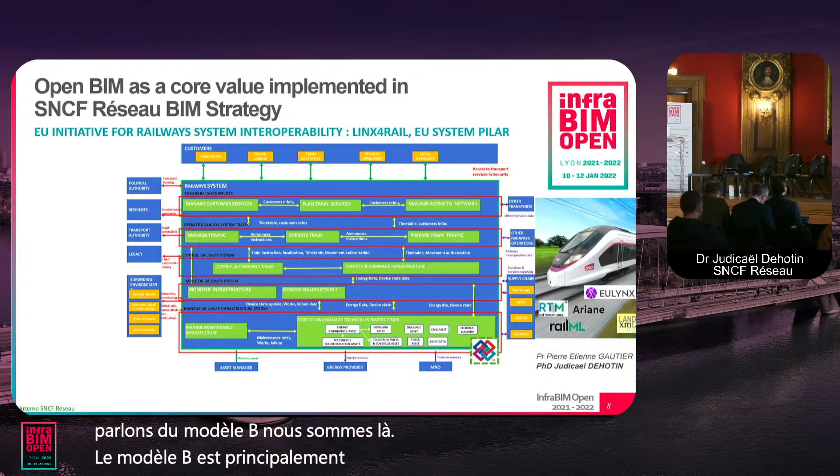You need to have information for the infrastructure. The infrastructure is the base. You have a turnout, and combination of turnout, you have some control and command stuff that manage the train direction, and these things are directly connected to the physical infrastructure. And that is where I want to come back to. When we are talking about BIM model, we are there. BIM model is mainly that. But we need also, if you have some infrastructure, not just to have a digital mockup, we need to transfer information about these things, physical infrastructure, to the control and command stuff.

If the information is not good because the BIM model is not good or doesn't have enough information or is non-shareable, we have some problem there, we have some problem there, and finally people don't have the train on time. So basically, that's the problem. And as you can imagine, many industries are involved in that.

It's not only one industry. So the issue of open BIM for us is how, what you see here in the vertical line, is about this information. It's about many industries, many software, many databases, and each box here may be software, may be a database, may be a process, may be people, may be organizations dedicated to one process. So if they need this information, if there is one provider, one technology provider anywhere, one thing we need is what is the added value of this box. We need to know exactly what is out. If not, we cannot manage all that. The railway system cannot be manageable.

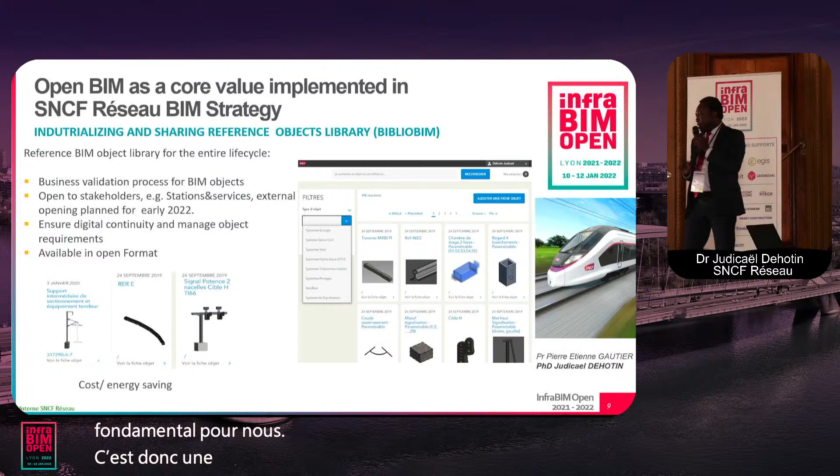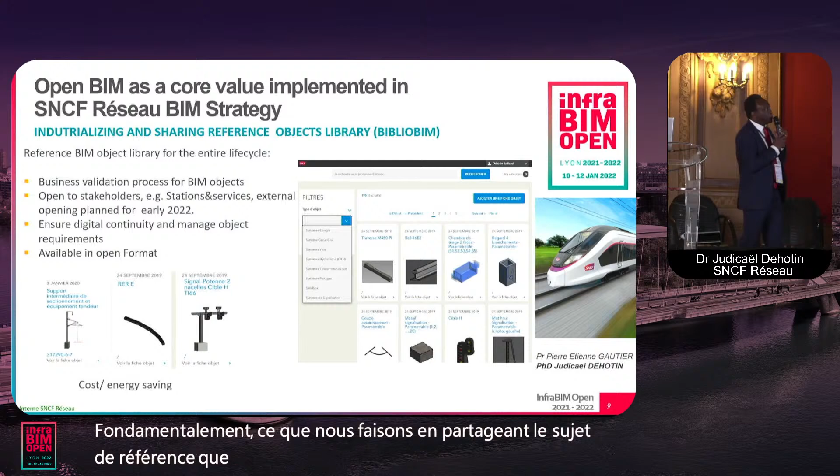So now I will go back into more detail on the BIM program. Basically what we are doing is sharing reference objects, we put in place a reference library for railway in the French railway system, called BIBLIOBIM, with the objective to share with all stakeholders. Inside this object, we have our own requirements around this object, and this is naturally available in open format. We don't tell people to use one tool or another, we let them have the choice to have the real performance, because what we need is the performance of the function we need to reach. You can use any software you need, but what we want is to use the right information and to output the right one.

And we also use this consistent with the French strategy on BIM. We have a BIM level 2 approach right now. That means many people can use different software because you have many domains, and each domain has expertise that we need to be sure is the right one for the system. And this information is shared to integrate it in a kind of common data environment at the center. And we choose one, but that is the core of the problem.

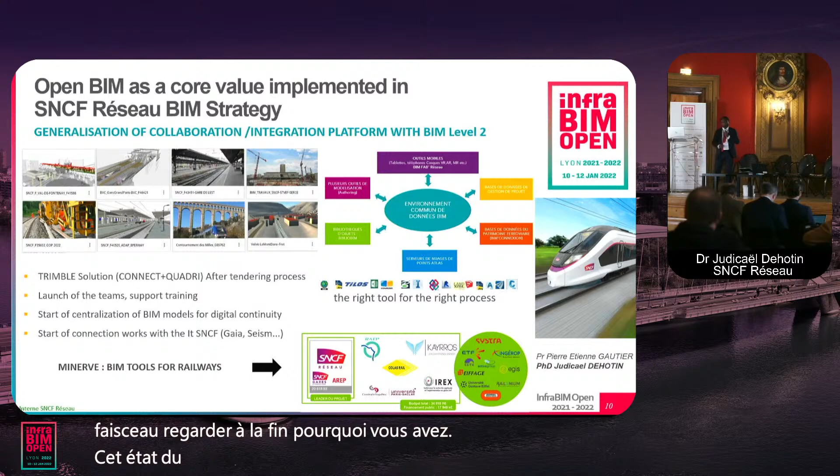And we also launched around that a new project called Minerve, for the railway system, about engineering of the system. We cannot build a good railway system without managing the requirements and the engineering of the system. So we are involved in creating or adapting existing tools for railway requirements. We launched a program to test, create, and share tools and requirements about what we need to do system engineering of the railway, and be sure we can manage the requirements, manage the performance of the system, the cost of the system, and have traceability - when you have a BIM mockup at the end, why you have this state of the model depends on the requirements you had at the beginning of the process. So we do that for this reason.

And a few words about digital continuity. In the digital maturity of the software, we have some workflows, we have BIM for conception, construction, we have a platform, basically BIM level 2, to share and organize the process. And for the digital twin, we have to deal with many databases to integrate, and also have a roadmap on that. We do this in parallel. Basically now we are doing experimentation, and building confidence in what we can do to make the system right and have BIM deliver the performance expected.

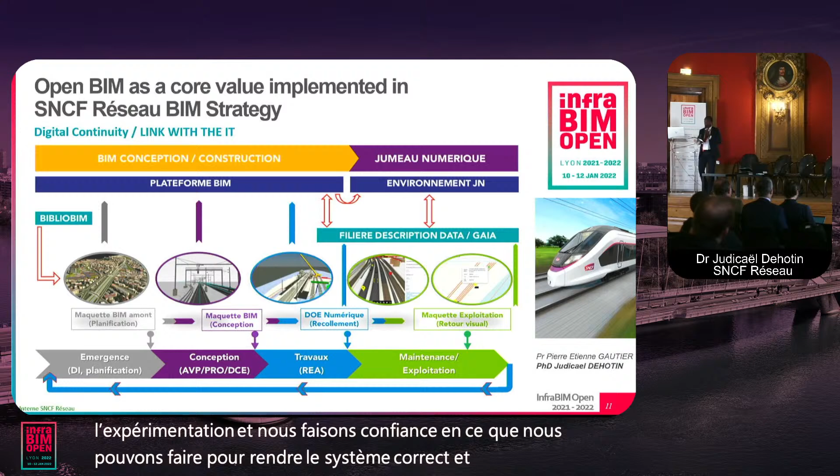Really to avoid that, because it's not cost saving. And about construction, we just reached the first BIM project that reached the construction phase, and we are doing something to prepare how we can bring BIM to the field. If you are interested in that, I invite you to scan this code on LinkedIn.

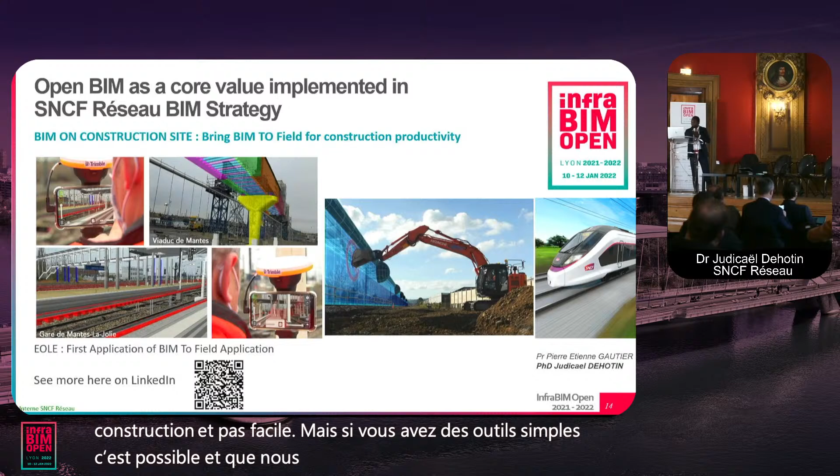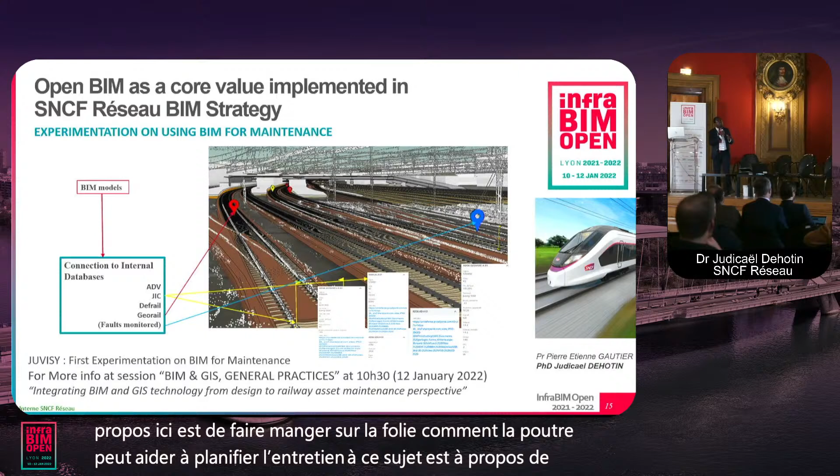We also have some implementation on BIM maintenance. If you are there at 10:30, I have one presentation on that. We have experimentation, and what this is about is to make, on the maintenance side, how BIM can help to plan maintenance. That is the talk I will have now, to present this experimentation in more detail.

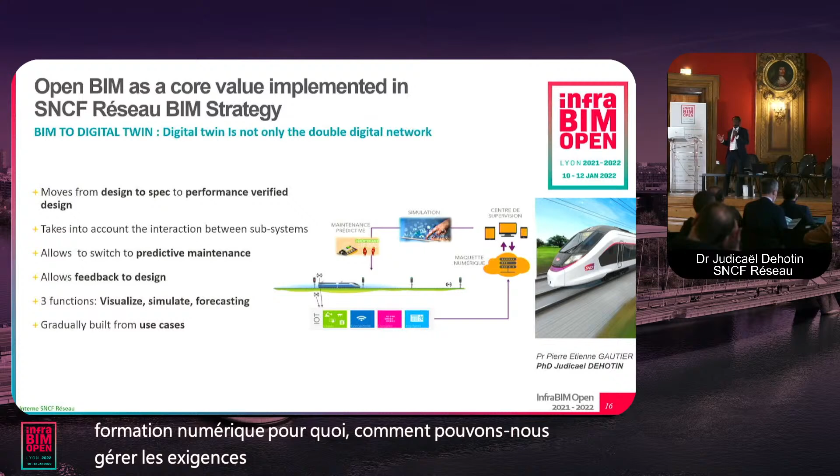By the end, the digital twin - we are working on it, with use cases we are developing. If we have a digital twin, for what purpose, how can we manage the requirements of the system, and which is the main use case that can bring value to the system. We make some experimentation on that, and progressively the idea is to develop more and more use cases and develop the capability of the digital twin.

Just focus on the performance that can be brought to the system, not to make the digital twin with everything on it, with the issue of managing so much information but not knowing exactly for what. And what is the initial requirement, managed to the state we have in the phase, and the system you have to manage, and the objective you want to reach.

So for the digital twin, the approach is really to bring this into the basic system engineering approach. You have some requirement, and you have some function, and for each function you can develop a component - you can develop software, you can develop a database, or you can just put in place a real process. By the end, you have some state of your digital twin, and you can trace back the traceability between the state and why it's there, and what the initial requirement was for that.

The idea is to have a digital twin based on 3 layers. The resource layer, which is the ground of information you manage to deliver service. The operation layer, which is really about using information to run the train, so how we can deliver service with that. And by the end, how we can deliver service to the end user and the customer. So that is basically the idea around that - we are working on it, it's an ongoing work.

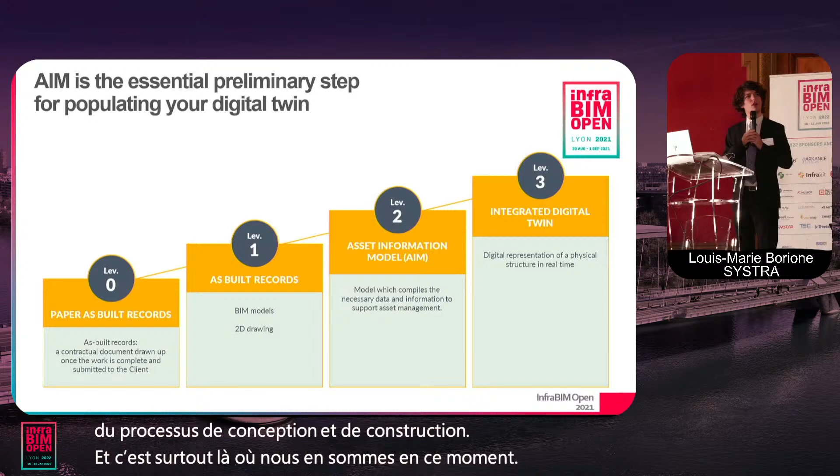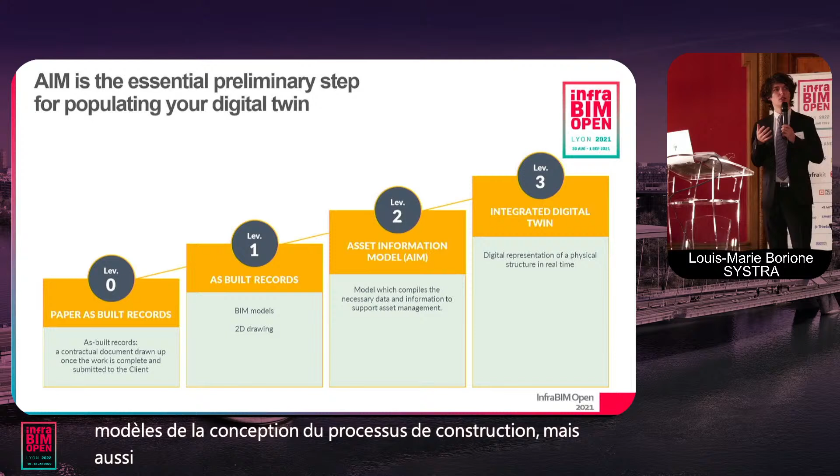We imagine that our goal is to be delivering a level 2, an asset information model. So you deliver all the BIM models from the design and build process, but also a dedicated asset information model which centralizes all the aspects of an asset needed for the client to operate and maintain this asset. And this is just before what we could call level 3 of the digital twin for the future, an integrated digital twin with every aspect.

Right now, we want to focus on something that is more achievable, not seeking something 2 steps ahead, but going one step at a time, from where we are right now, level 1, to what we do on some projects, level 2 of the road to digital twin.

So to really understand the purpose of the asset information model, it is to be able to centralize and structure the information that will be required for the operation and maintenance phase. So it could be, for example, a list of equipment, total maintenance cost, record of installation and maintenance dates. Those kinds of data are not currently in our BIM model. In our BIM model, we enter design information, we enter construction management information, but not those kinds of information.

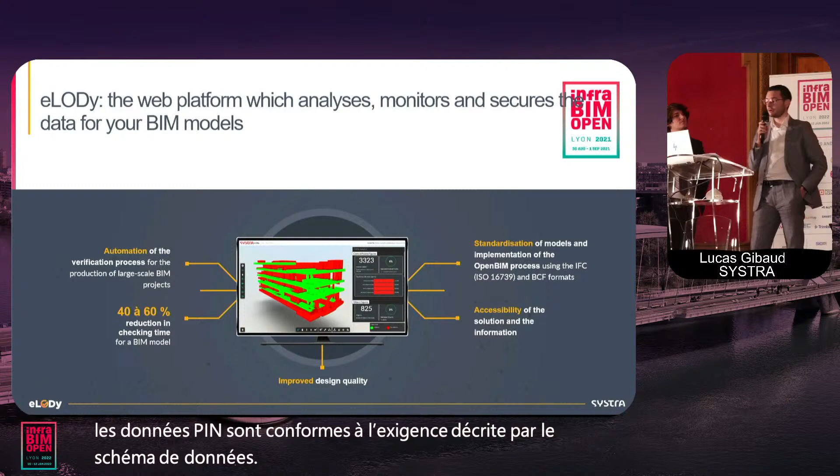So if we take the schema presented by Louis-Marie just before, we have to ensure that the data contained in the project BIM models, which is the PIM data, is compliant with the requirement described by the data schema. So in order to check these requirements, we have developed a BIM model checker application called eLODy. eLODy is a web application that allows the user to get the data schema for his project and to use it to control the project information model.

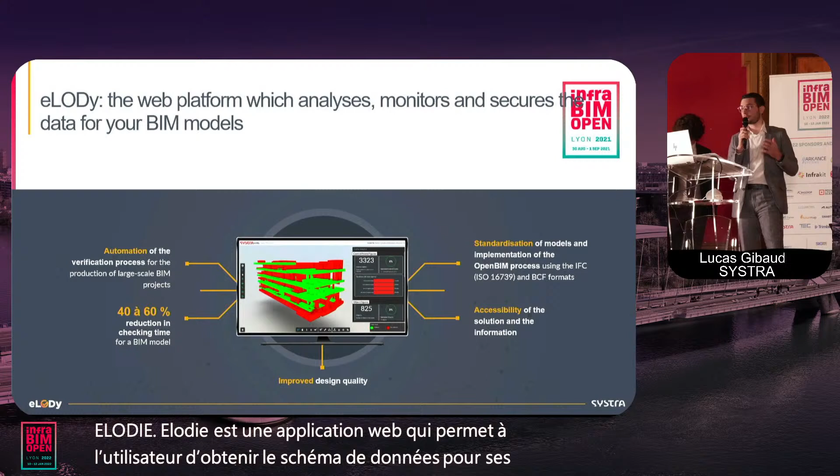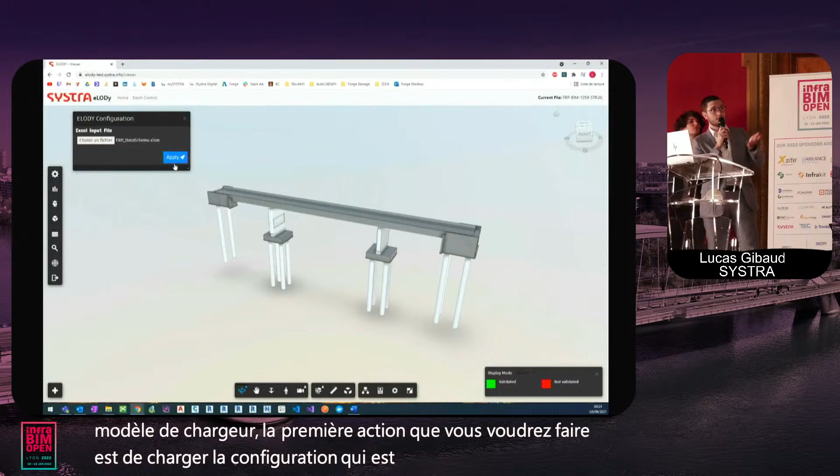So now let's move to the application for a quick demo of the functionality of the tools. When you are in the application and you have loaded your model, the first action you will want to do is load the configuration, which is the data schema. This configuration is stored in an Excel file, and as soon as you have loaded this configuration, the result of the checking will be displayed on the application.

You will have in red all the objects that are non-compliant with the data schema, and in green all the compliant objects. So then when you have launched this checking, you will need to get a deeper understanding of the control.

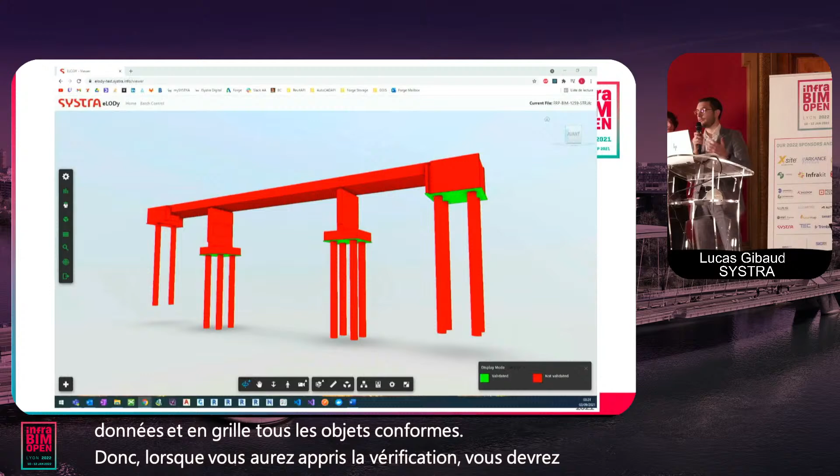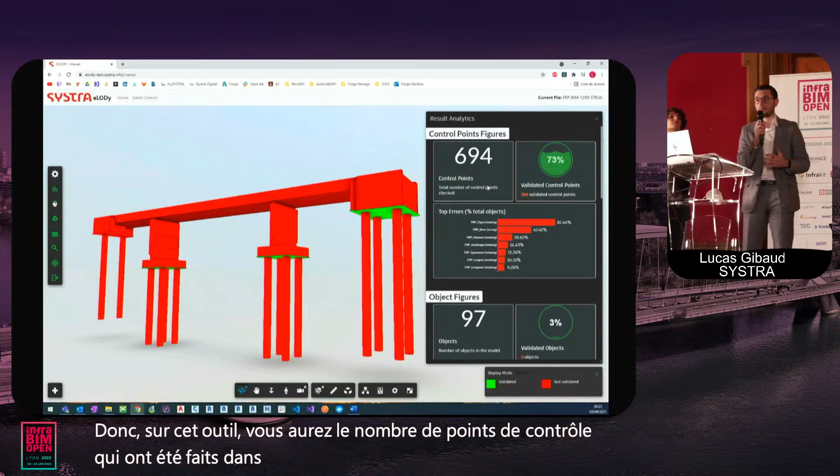So you will use the first tool to have a global vision of the results. On this tool, you will have the number of control points that have been made in the model, the percentage of the control points that are validated. In the section just below, you will have a very interesting section where you have the most frequent errors that have been found in the model.

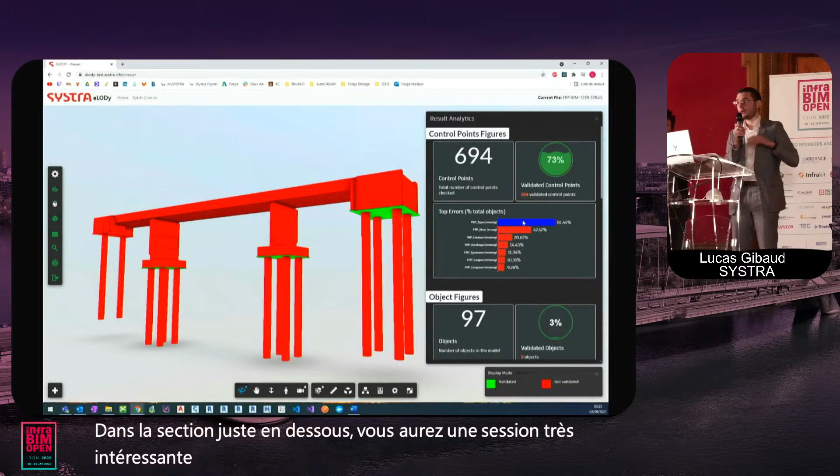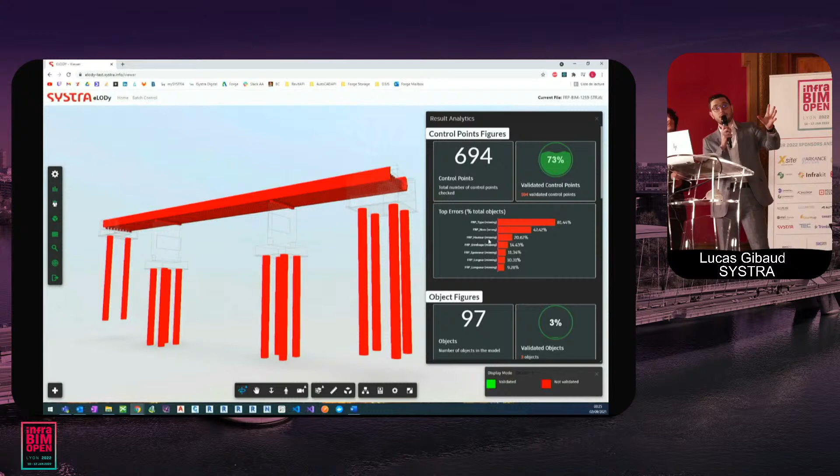So what we can see, we have a first property, FRP_type, which is missing in approximately 85% of the objects. The second one is another property, FRP_Nom, which is wrong in approximately half of the objects in the model.

Then you will have other figures. Here you have the object figures, so you have the number of objects in the model, the number of validated objects, the object with missing properties, the object with blank properties, and finally the object with wrong properties. So it means where the value of the properties is wrong.

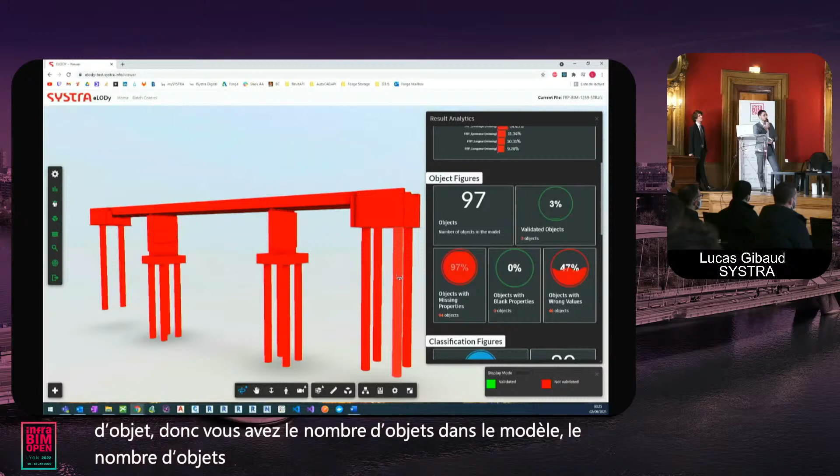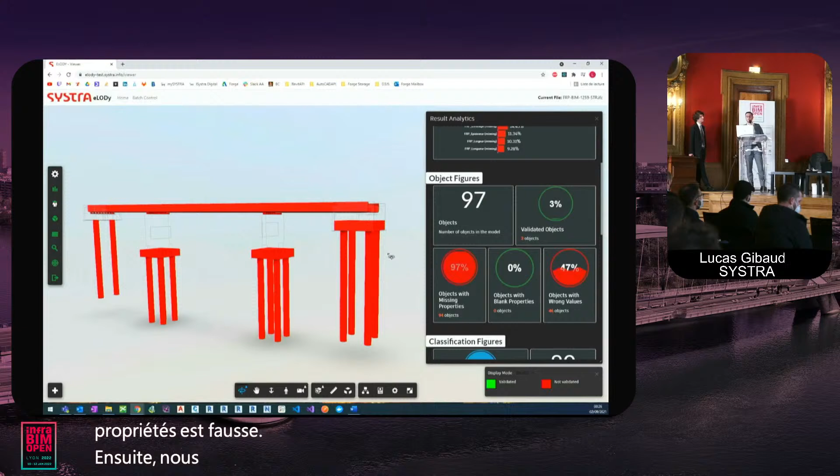Then we will have a very important section, the section about the classification. Classification is very important because it's the way we will recognize the type of the object inside the BIM model. So we will have here the figures of the check according to the classification. We can see here that it's quite good because 100% of the objects are well classified. We also have the number of classifications.

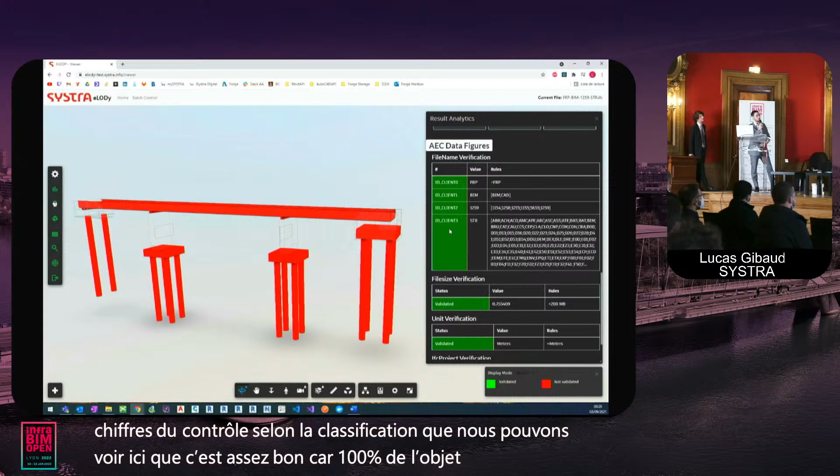And finally, you will have the first detailed results. Here are the results on the file. So you have the codification, the file size checking, the unit checking, and then finally, the IFC structure checking, where we will check all the properties of the IFC project, the IFC site, and the IFC building.

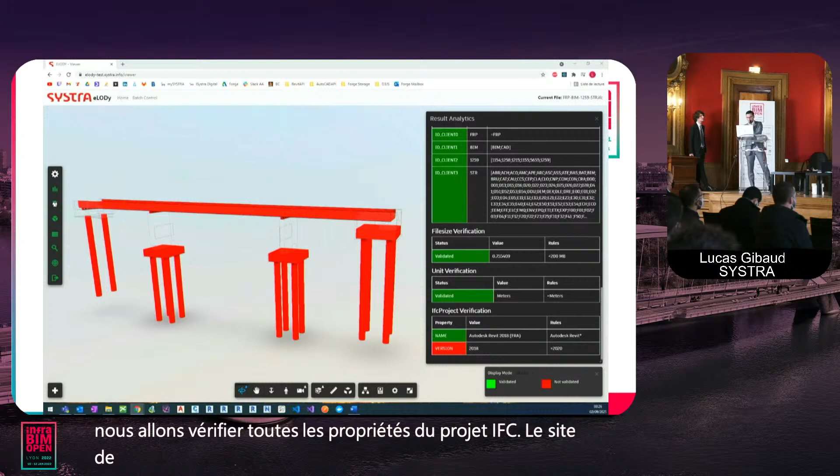So this is a tool to analyze the results globally, but then you will need to go deeper into the detail to understand exactly where the issues are in the model. For that, we have another tool, which is a table. In this table, you will have the list of all the control points that have been made in the project.

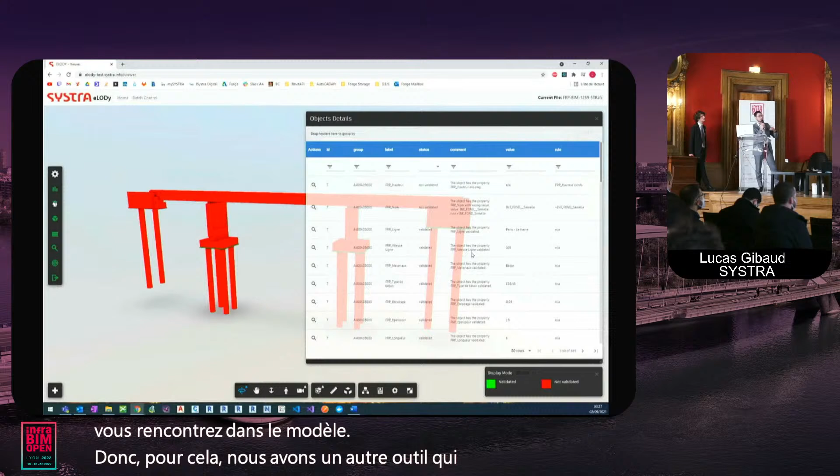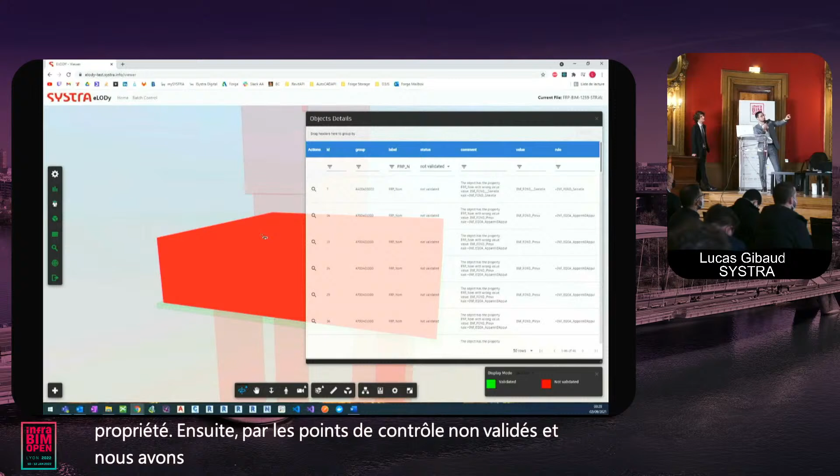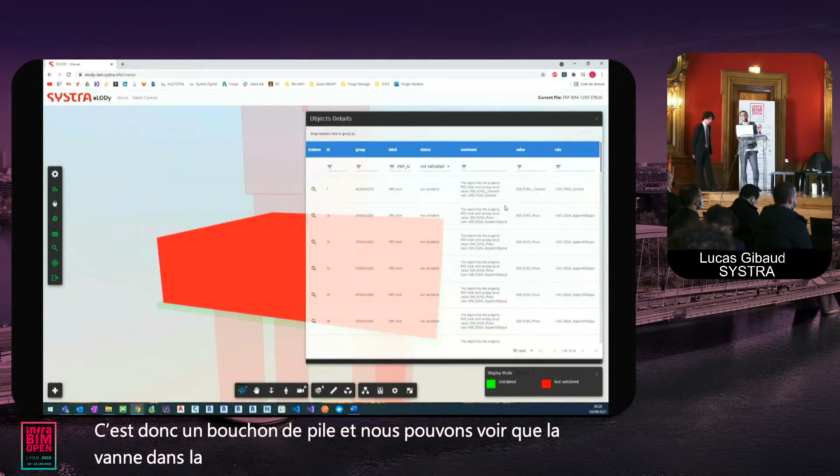So we have talked earlier of a property which is FRP_Nom. We will filter the control points by the name of the property, then by the not validated control points. And we have on the first line one issue. This issue is on this object, so it's a pile cap. We can see that in the value we have an error, and in the name we have 2 underscores instead of only 1 in the values that have been expected by the data schema.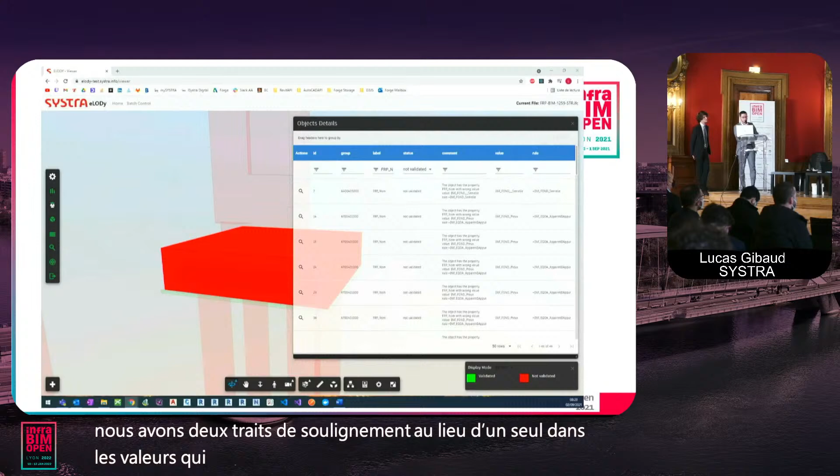So once we have analyzed this data, it's very important, as I said earlier, to be able to communicate and share these results with the production teams. For that, we can export through eLODy in 2 different formats. The first one is the Excel format.

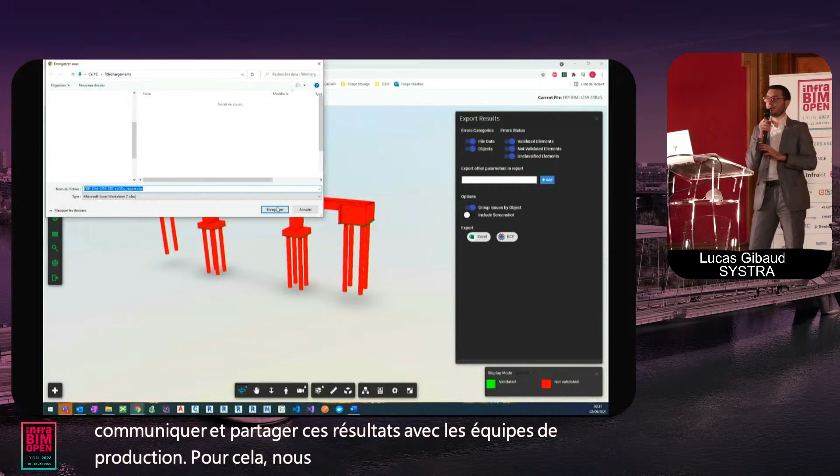Excel is a very easy format to share across all the members of the project. So you can export the reports, which will be basically what you have in the application, but stored in an Excel file, so that you can store the results of the control.

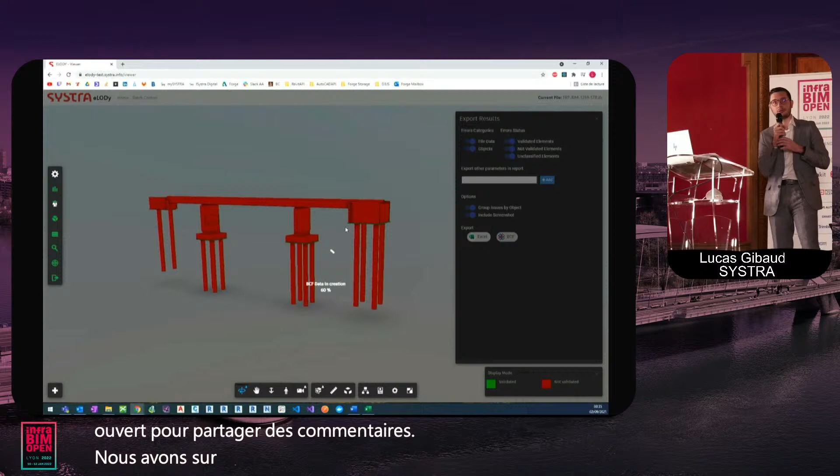And the second option for the export will be to use the BCF format. The BCF format is an open BIM format to share comments we have on the BIM model, and it will be attached to objects. So we can export all the results in this BCF format.

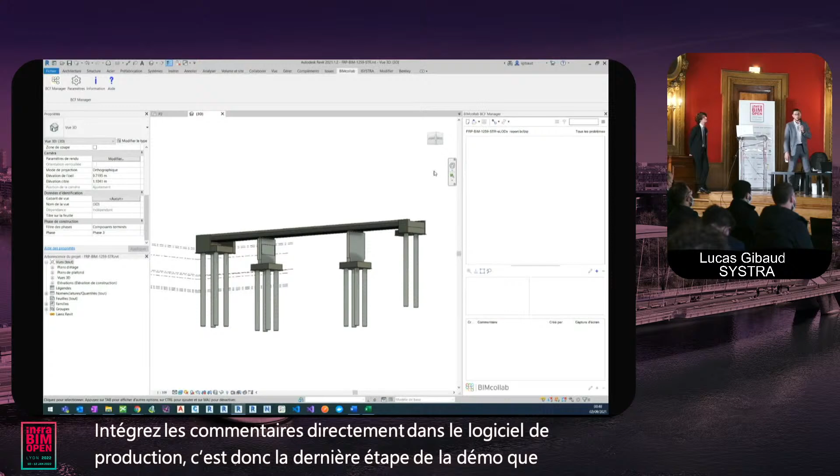And basically we can use this BCF format later to integrate the comments directly in the production software. So this is the last step of the demo. We will use directly in Revit this BCF format to get all the controls that have been made in eLODy, and to directly correct all the inconsistencies we have seen.

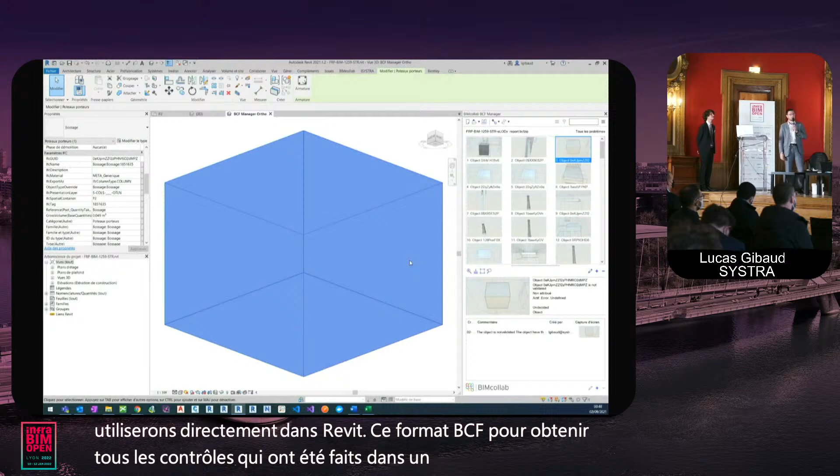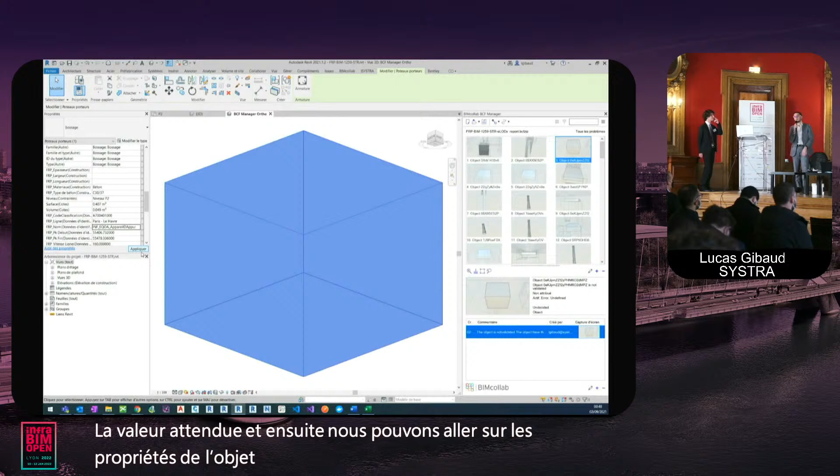So here we have one of them, and we can see that we have an issue on the property FRP_Nom. We can see the expected value, and then we can go to the properties of the object to change it to the correct value. And once the model has been corrected, we can of course re-upload the model in the application to check if now the model is 100% compliant.

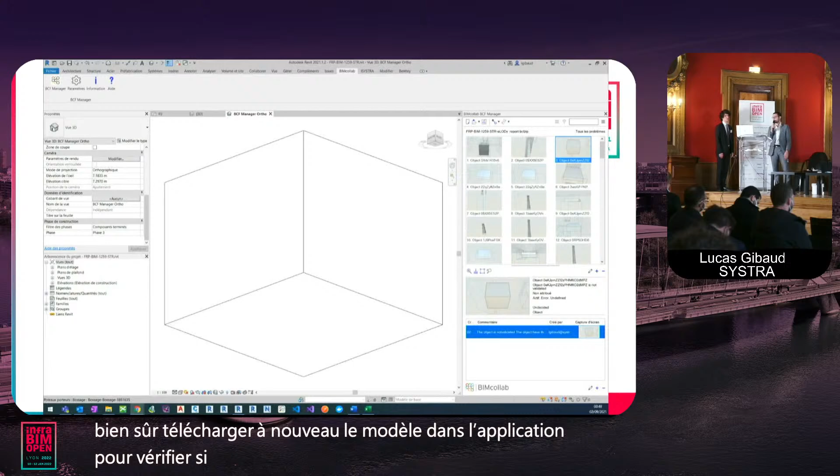Thank you. So what we've seen so far is how you can define a data schema to check if your project information models are compliant with this data schema. And then we'll see how we can build the asset information model from there.

So we go back to our tool, Pablo. Same as eLODy, a web tool dedicated to build the asset information model. And we'll show you. So we stopped there where we created the list of object types that you have in the properties, and he has made a small modification on the assets.

Here I create a new asset. So let's imagine that Lucas submits his bridge that we saw earlier, and we want to create an object that will be supporting the information on the asset at the level of the overall bridge. So we need to create this in the application, an asset that we called FRP viaduct, if I remember well.

And we can add the properties that we were expecting, not on the object side, but on the asset side. So we enter manually, I think it was a unique asset identifier and a length. And then you can open the model.

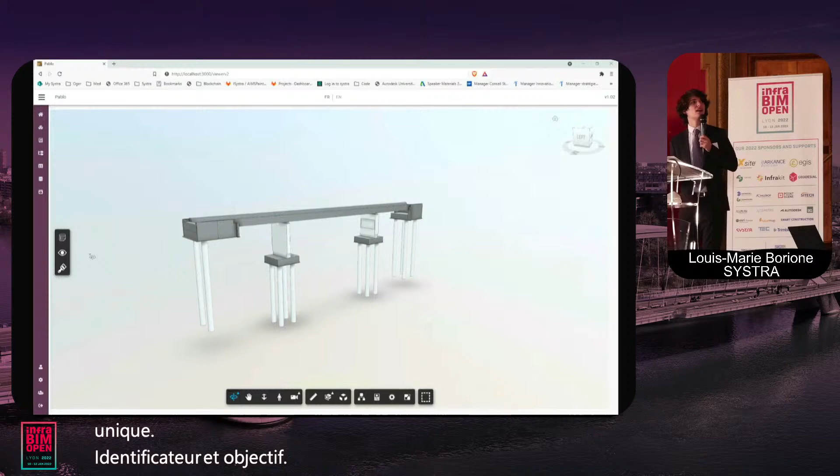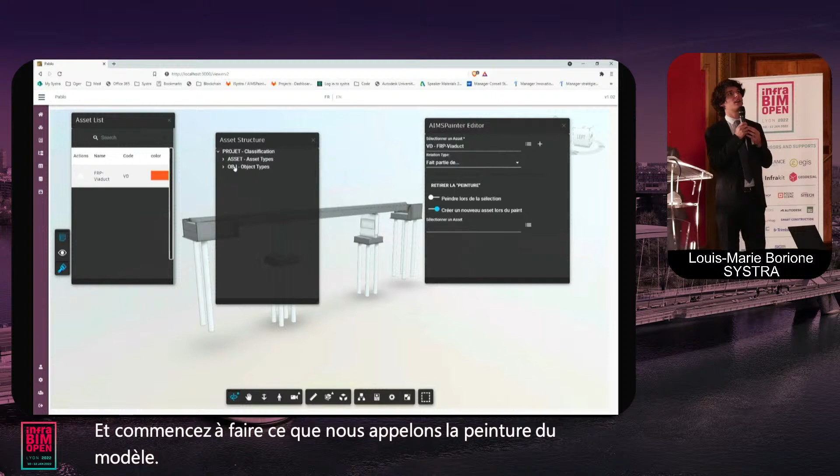So it's the same bridge as Lucas showed. And we start to do what we call the painting of the model. So the painting is really to say, on this bridge, I want to identify that, for example...

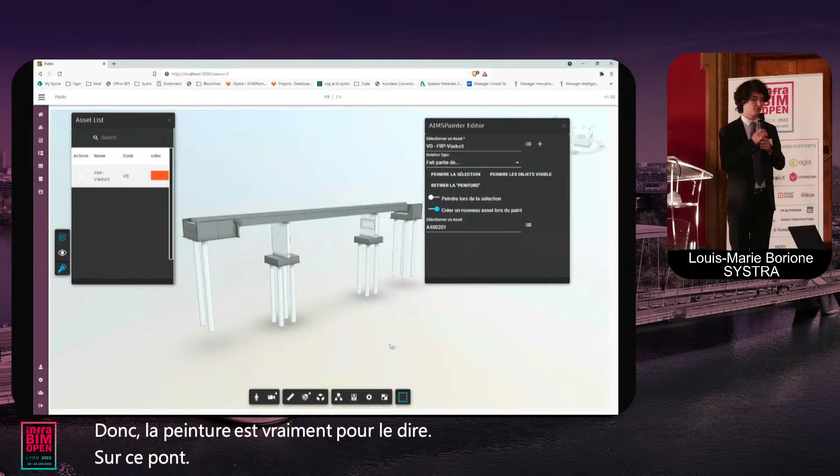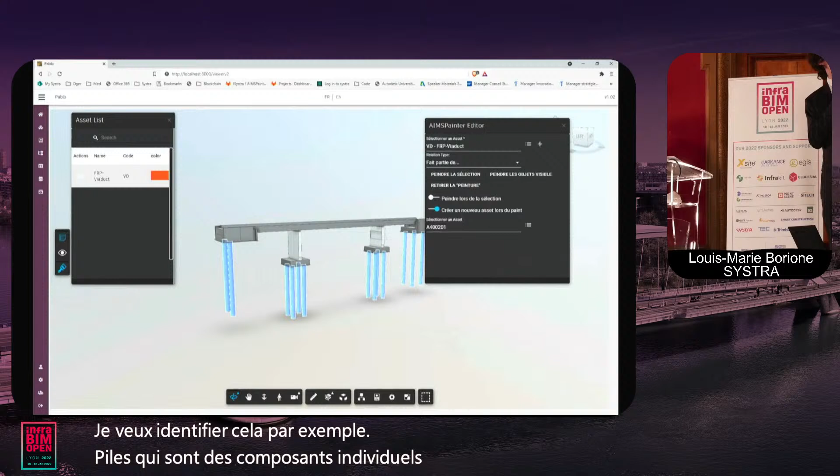...that all of the piles that are individual components in the project information model, I have maybe something like 20 objects with different properties, different lengths, different maybe material, I don't know, the concrete grade could be different on some of those objects.

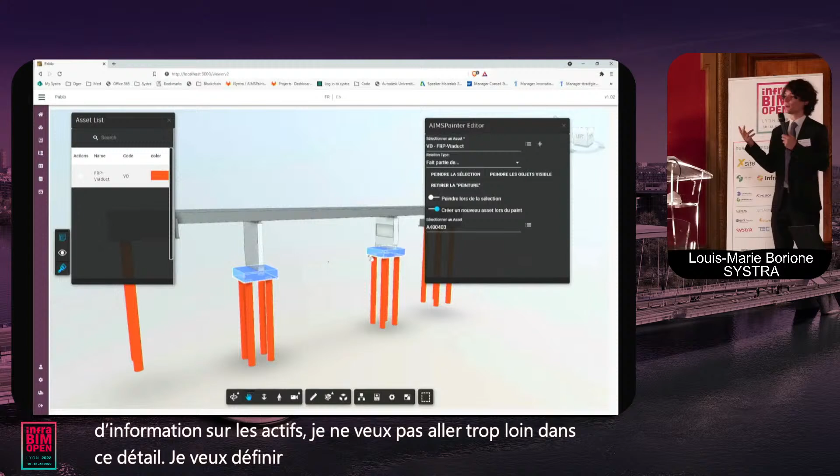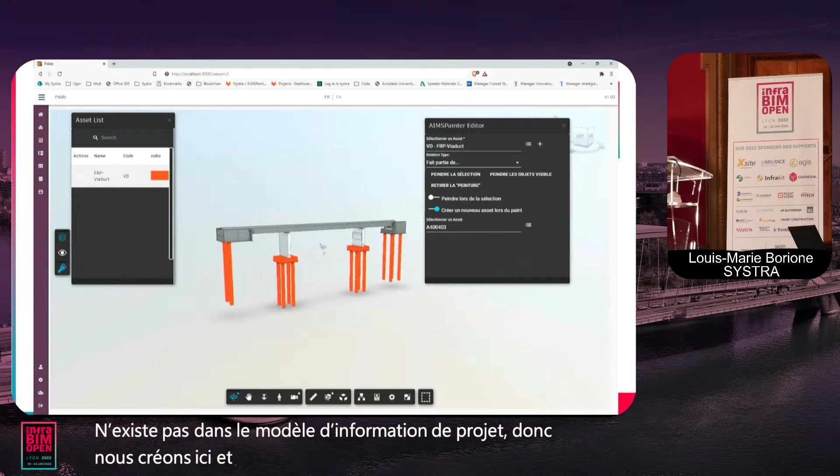But in the asset information model, I don't want to go too deep in this detail. I want to define a new asset, which will be the foundation system. And the foundation system does not exist in the project information model. So we create here and we say all of those objects that are in red are one asset, which we could call the foundation system.

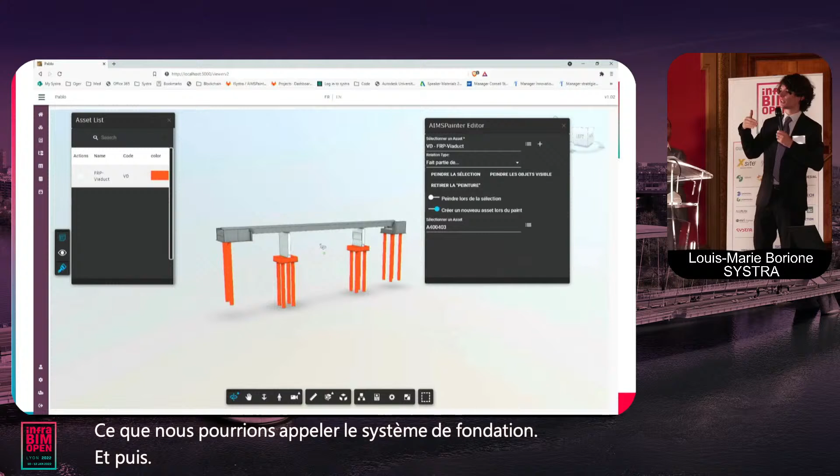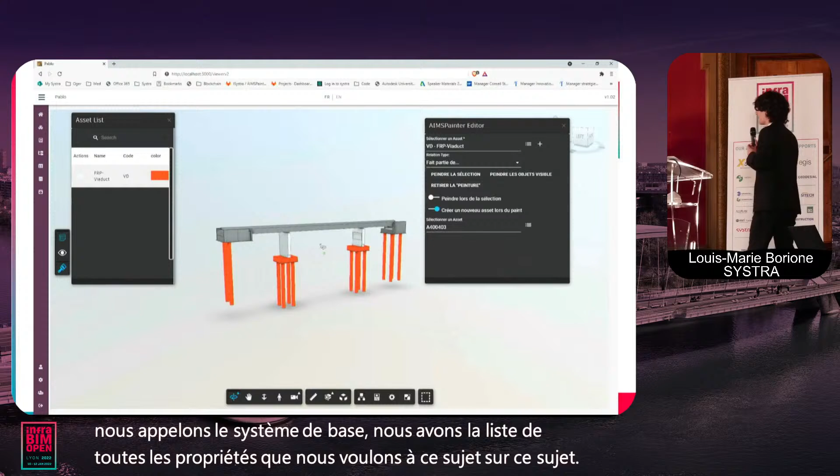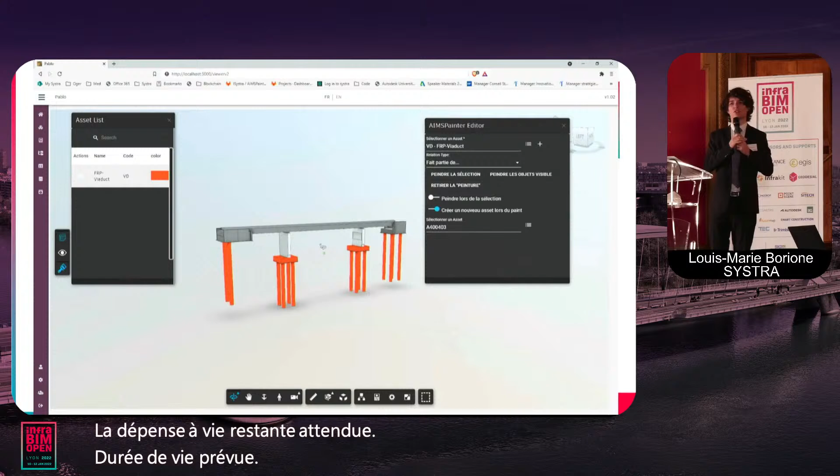And then in the data schema, if we define an object that we call the foundation system, we have the list of all the properties that we want on this object. So let's say, for example, the expected lifetime. And by doing this, you reorganize all the information that are stored in your BIM models to build something that will be able to be transferred to your clients, to his asset management system.

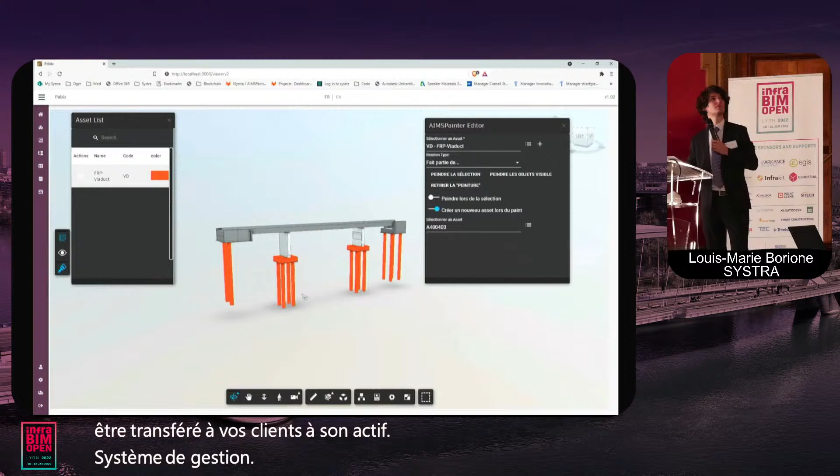So this is the last part. In conclusion, at the end of the process, you define your properties, you define your object type, you define your asset register, which is where you list all the types of assets. You build your asset information model by reorganizing the data of your project information models, and all of this data can then be transferred to the client in this asset management tool. Thank you very much.

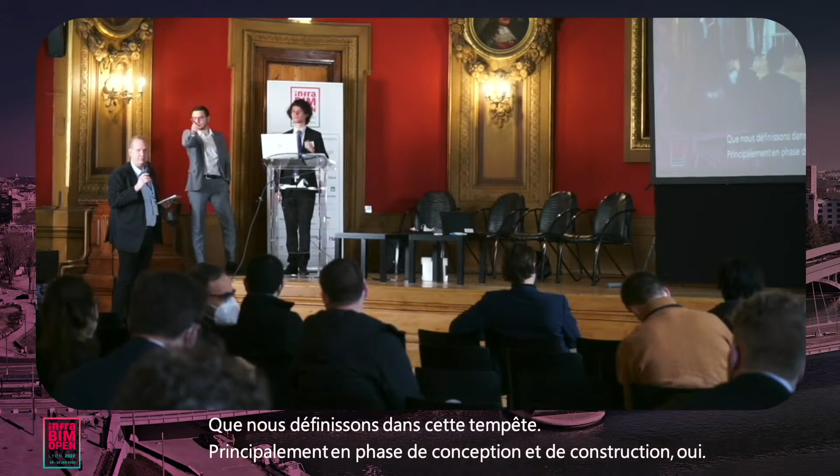There is one question from the audience here. Sorry, it's not a question, maybe more, I'm working with these guys, maybe more an answer to the first question.

The information handback for the asset information model to the client is a key issue, and how we hand back this information is very important. What we try to do is have a database of all the asset information that we can give to them, which is quite agnostic, a database they can use. It's also their duty to integrate this into their information systems. Some of them already have this kind of solution, but not all of them. Of course, the solution can help them carry on and ensure that this information remains consistent with the reality of the asset when you maintain and operate it.

And the second part is, we will have this asset information database, and also all the BIM models will have all objects identified with the unique identifier of the asset, so we know to which asset it is related. With this, we give them the basis to start building a good referential for their digital twin. But it's not the complete digital twin. Of course, you then need to connect all of this with hot data sources like IoT and so on.

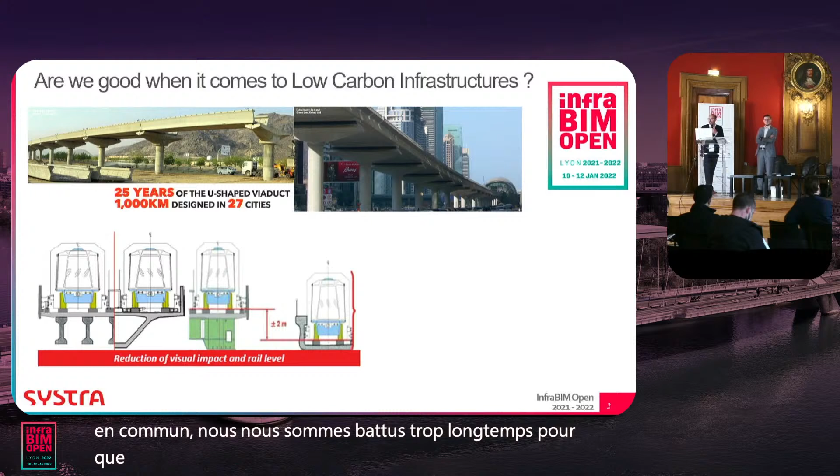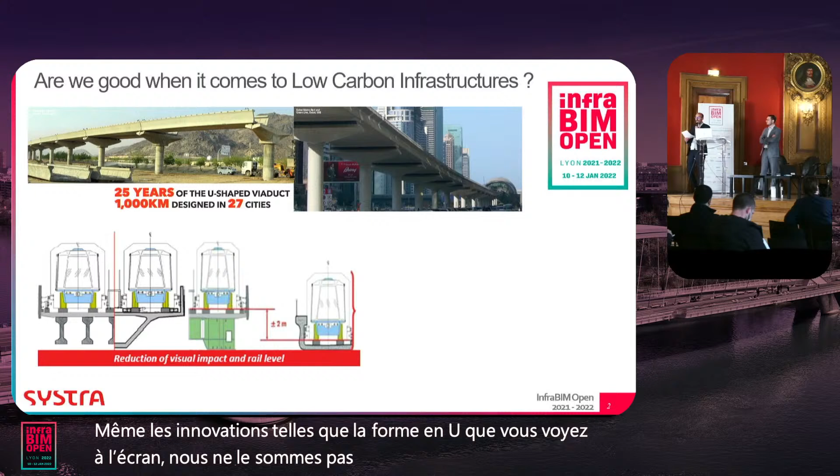of the carbon tracker. Climate change is a reality, and it is our duty as individuals or companies to ask ourselves what we can do to improve carbon emission reductions. As rail and mass transit transport designers, we thought for too long that it was sufficient to state that because of the positive impact of public rail transport, we had nothing to prove on this matter. Even innovations such as the U-shaped viaduct that you see on the screen were not initially evaluated for their environmental benefit, but mainly for their cost benefit.

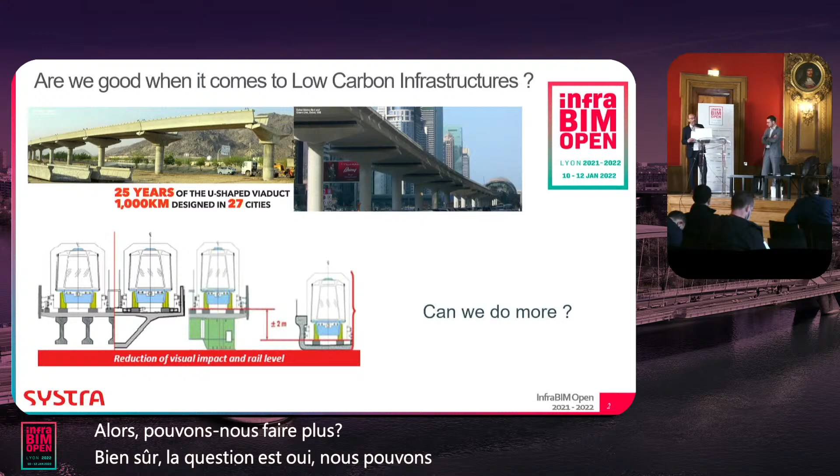So can we do more? Of course, the question is, yes, we can do more. And I would say, yes, we have to do more. At Systra, doing more meant shifting from a qualitative approach to a more quantitative and systemic approach in regards to carbon emissions.

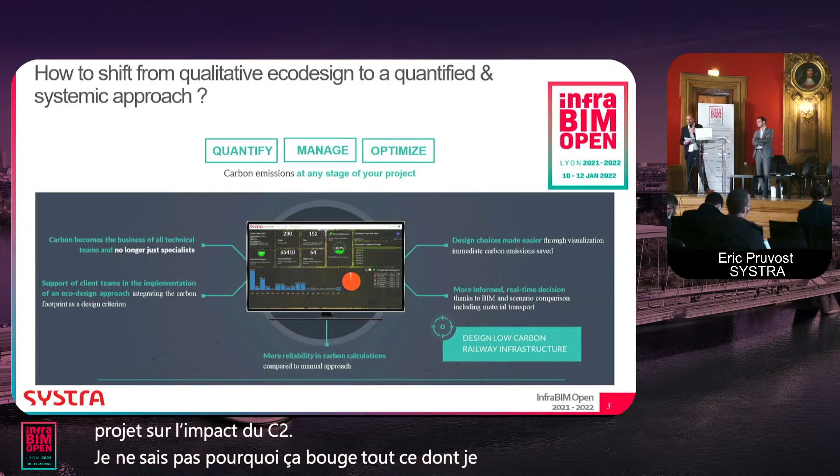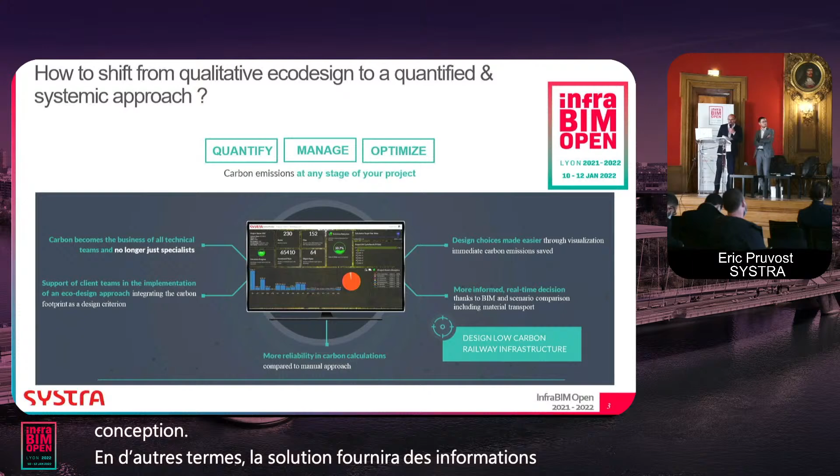And the question is how digital, and more precisely the carbon tracker solution, can support these objectives. In fact, carbon tracker allows us to take benefit of the BIM data we're creating on the project to provide information to all project stakeholders about the impact of CO2, the decisions they're taking on the carbon footprint of their asset, and this during the design process. In other words, the solution will provide information to the designers about their decisions and the impact of those decisions, and on the other side, it will provide our client all the information they need to monitor and track the evolution of the carbon footprint of the asset they ask us to deliver.

So to develop Carbon Tracker, the main challenges we faced were to capture the data and make sure this data was relevant and understandable by our algorithm to calculate the CO2, and this for any kind of infrastructure, any design phase, and also any data format.

As we could not rely on OpenBIM standards when we started to develop the solution, we had to find a way to go around this difficulty by implementing some configuration rules that you will have an overview of during the presentation and the demonstration.

The second point is also to ensure that the quality of this data is checked and verified, so we have reliable input data to do the calculation. So before giving the floor very briefly to Luca and then to the presentation...

We're sorry we can't do a live demo because technically it was a bit difficult, so it will be recorded. But I would like to highlight that the CO2 calculation we're doing in Carbon Tracker is not only the quantity materials evaluation, it's of course a whole life cycle assessment of the carbon emission.

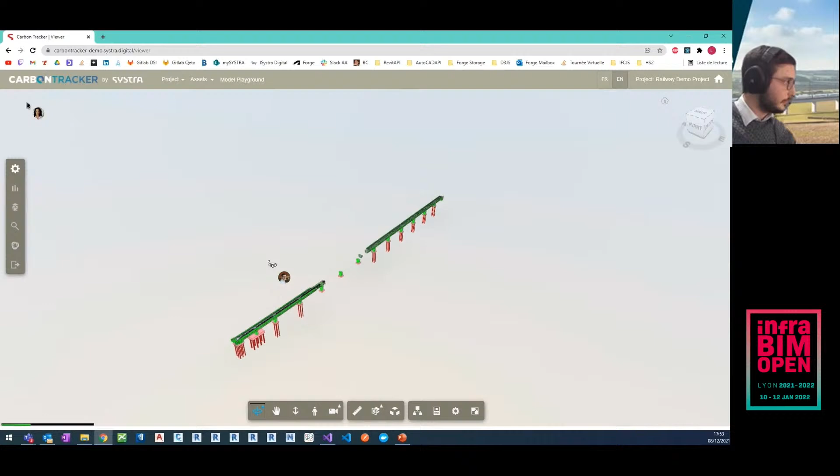So you have all the basic functionalities of BIM model viewers. You can, of course, select an object, view its properties. You can also navigate through all the data of the model.

And we have extended this viewer with some specific functionalities for Carbon Tracker. So these are all the buttons you have on the left side of the screen.

The first action you would want to do when you open a BIM model is to check if the BIM model is compliant with the requirements you have on the project.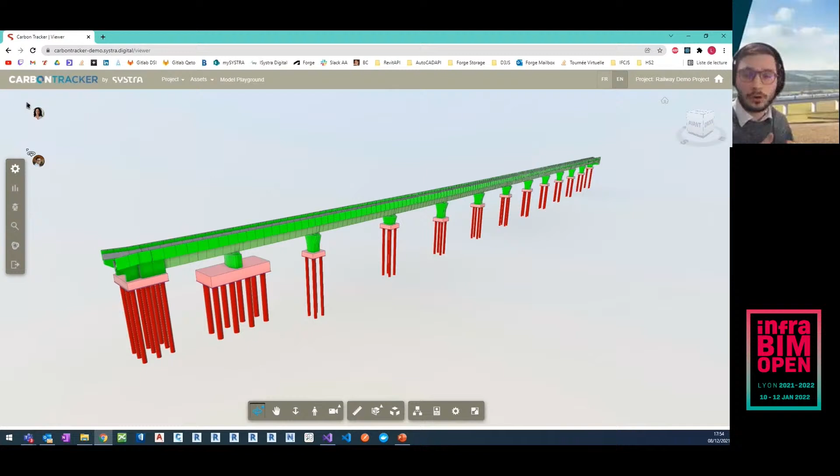It means checking if all the objects of the model can be taken into account for the carbon calculation. For that, you just need to click on the first button and click apply. And automatically, all the checks have been done on the BIM model.

And you have on the screen all the objects that are compliant in green, and the objects with inconsistencies in blue. So for example, this object has the asset tag parameter missing or the classification parameter missing.

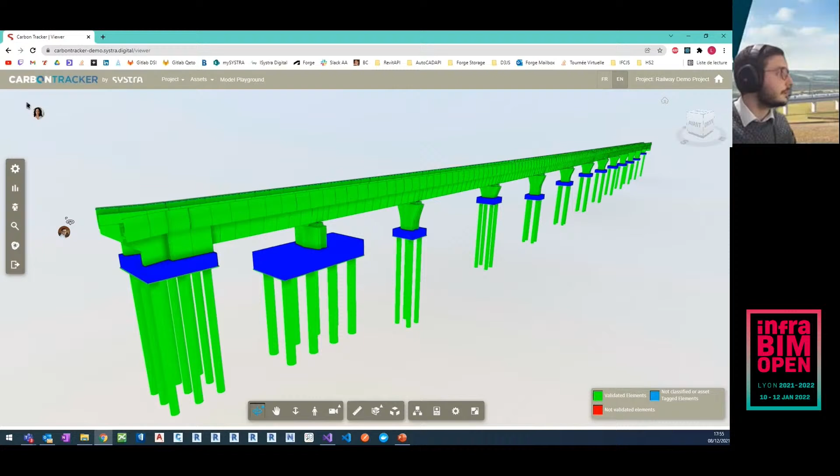The other functionalities we have here in Carbon Tracker will help you analyze the results of this check. Let's select the first one, which is the model analytics. It will give you some figures about the check.

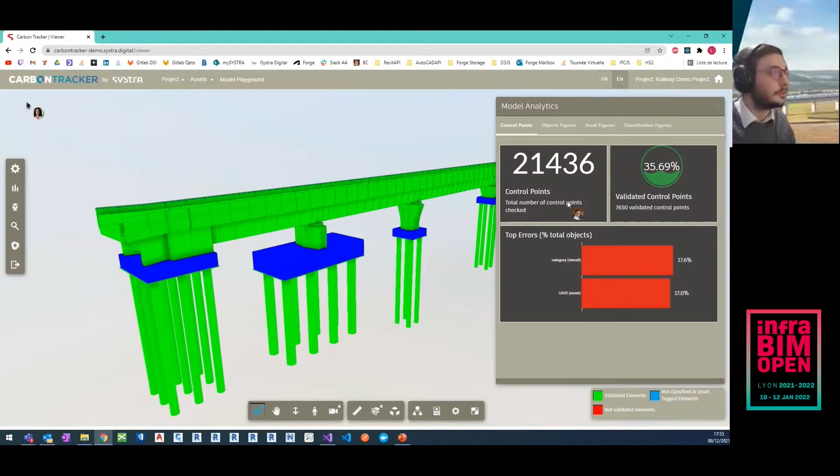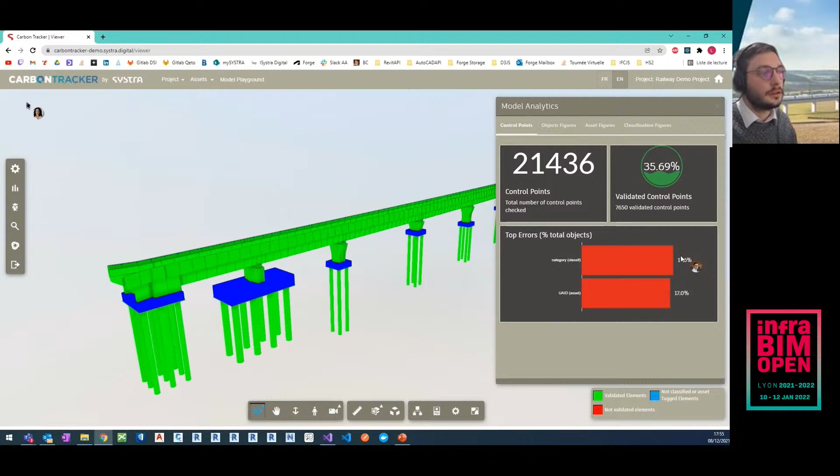We can see here the number of control points that have been made in the model. This section will give you the most frequent errors spotted in the model. For example, here the property category, which is used to get the classification of the object, is missing in approximately 18% of the objects. If I click on the rectangle, it will let me see on screen only the objects with these missing properties. This helps the person checking the model understand what the inconsistencies are.

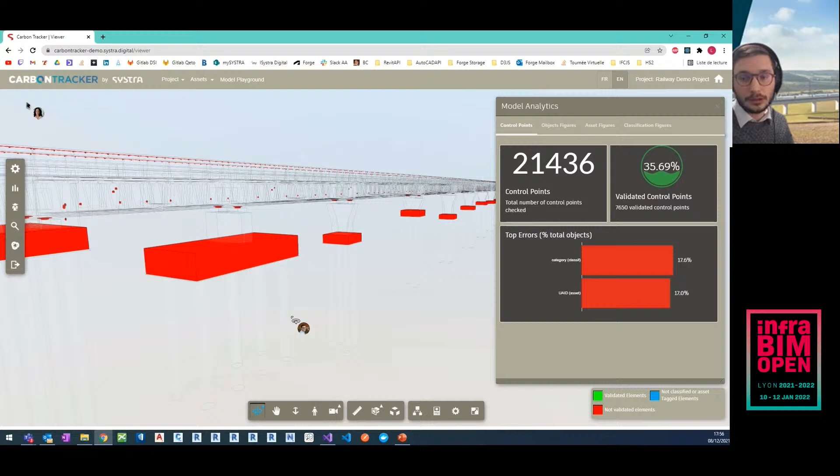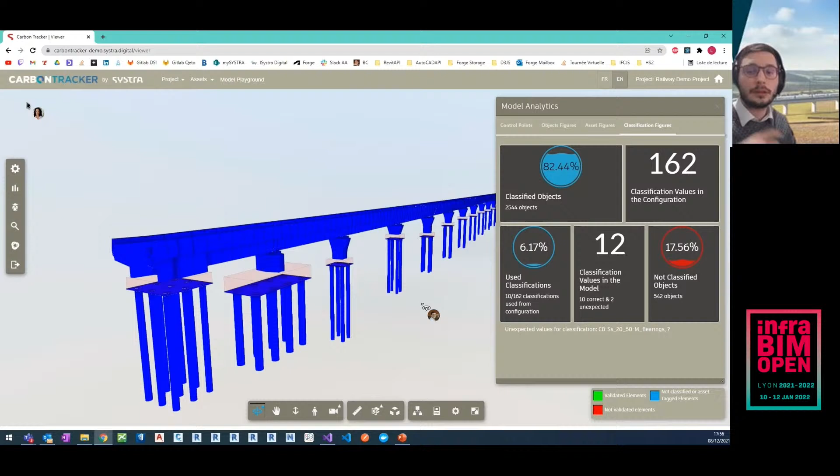And of course you have a lot of other figures. For example, here you have the object figures, then the asset figures, and finally the classification figures. The same way, you can click on the graphic and it will change what is displayed on the screen. The classification is a very important topic because it allows the software to make the link between the object and their types with the Carbon Tracker database of all the project components.

Unfortunately I won't have time today to show you all the functionalities to analyze the results, but it's worth mentioning the export control report functionality, because it's quite important on a project: it allows the user to share and communicate the result of the checking. We have two different formats. The first is Excel, which is quite easy to share on a project since everyone can open an Excel file.

The second format is BCF, an open BIM format that can be easily integrated into all the BIM production software. And you have the comments which are linked with the objects.

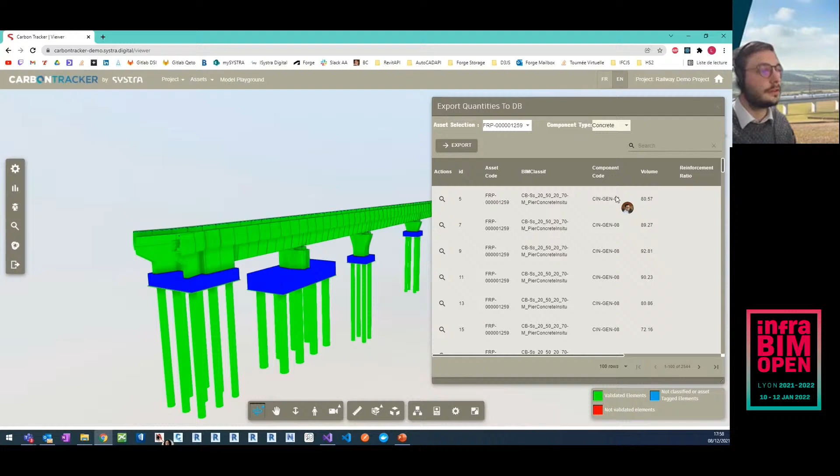Finally, the last functionality of the viewer is to export all the quantities taken from the model to the database for the carbon calculation. In order to do that, and to have a double check of what will be taken, here you have a table of all the data that has been taken from the model.

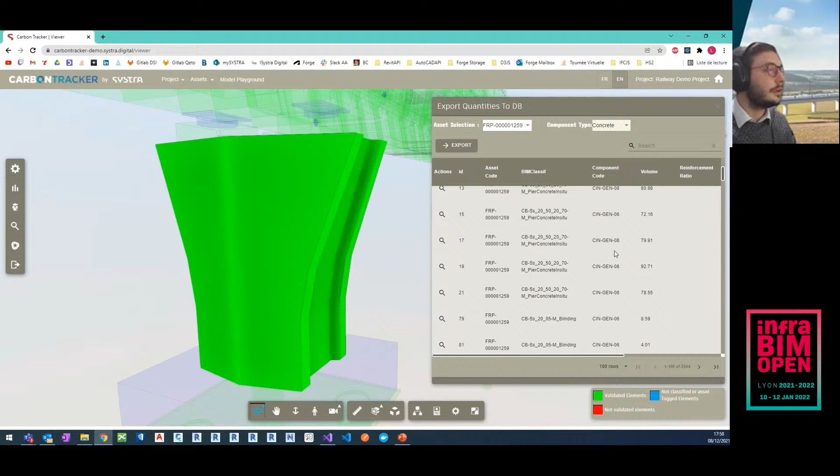For example, if we look at the first row here, we have a pier, and we can see that this pier is approximately 81 cubic meters of concrete. This value will be taken and sent to the database for the calculation. As soon as you are happy with the data, you can just click on export, and automatically all the quantities of the BIM model will be sent to the database of the application for the calculation.

Now let's move to the results. In order to see the results, we can see them at the project level. For that, we go to the cockpit page. The cockpit page is a dashboard, and of course this dashboard is composed of several sections.

On the top left side you have the big figures of the project. For example, we have 233 assets. Here is the number of objects that have been taken into account for the calculation, the number of files, and the number of object types.

Here you have the result in terms of carbon emission over the whole life cycle. When we analyze the project, we decompose the result into several life cycle stages. The first one, A1-A3, is for the production of the materials. The second, A4, is for the transport of materials from the production site to the construction site. Then you have A5, which is for site activities.

Then you have B2, which is for maintenance. You have B4, which is for replacement. B6 is for use—meaning any energy consumption from the objects in the project. And the last one is C1, for the end of life of the object, for example if the asset has to be deconstructed.

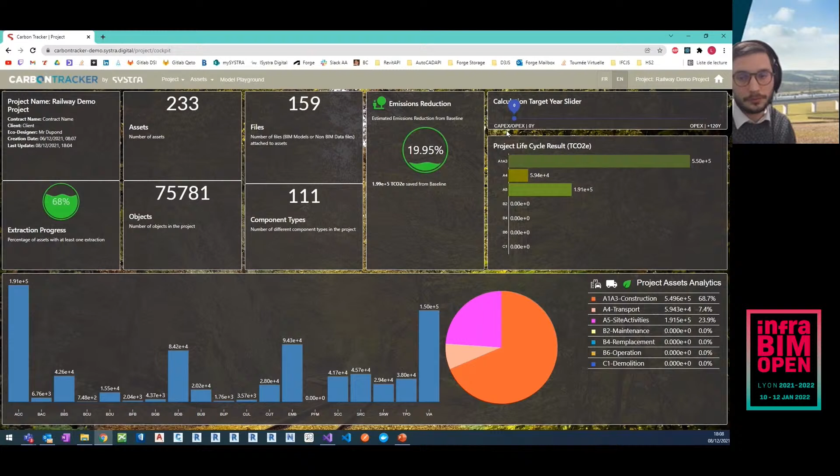So this is how you can view your result at the project level, but you can, and you will need to go much more in detail in order to analyze where are the hotspots of the carbon emission. For that, you can go to the project analysis page, and you will have a very specific graphic here.

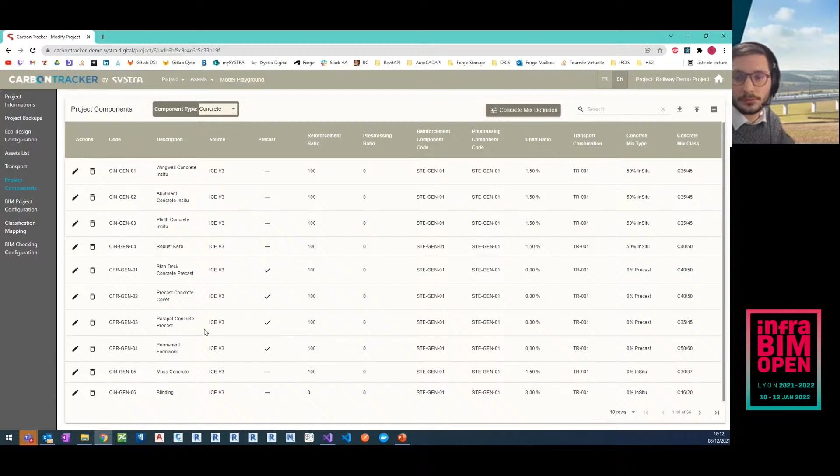So now I will move to the project components in order to change the concrete of the ground slab concrete in situ. I move to the third page. Here is the ground slab concrete in situ. I edit, and here I change the concrete from a 0% replacement concrete to a 70% replacement concrete. And as soon as I click the save button, automatically Carbon Tracker will recalculate all the results of the carbon emission for all the project.

Basically, it will go over all the objects of the project to see which are the ground slab concrete in situ objects, and will recalculate the carbon emission of all these components. Normally it should take approximately 20 seconds. And once it's finished, we will be able to go back to the analysis tool to compare the two versions of the project.

Yeah, so it's finished. We can now go back to the analysis tool, and I can activate the compare tool. I will select the previous state, which is this one. On the left side we have the current state, and on the right side the previous state, where the cement of the ground slab concrete in situ object is not replaced.